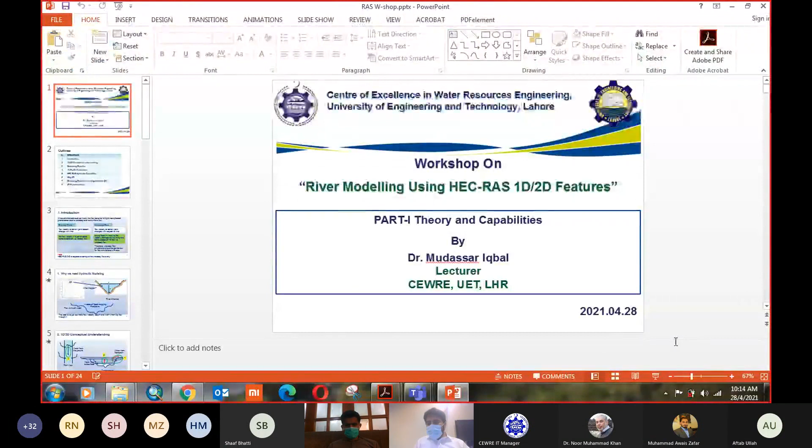Is it in presentation mode? Please just confirm for me. Yes, it is clear for me.

Myself, Dr. Mudassar Iqbal, working as a lecturer at CEWRE, Lahore. Today, the part that I'm going to present is about the workshop on river modeling.

Dr. Mudassar, I cannot hear your voice. Your mic is very far away from your mouth. Is it clear now, sir? Can you put it close to your mouth? Yes, I think it's closer now. Okay, can you confirm for me? Yeah, now it's better, please speak loudly. Okay, but firstly, confirm that your voice is too loud, so speak a little softer.

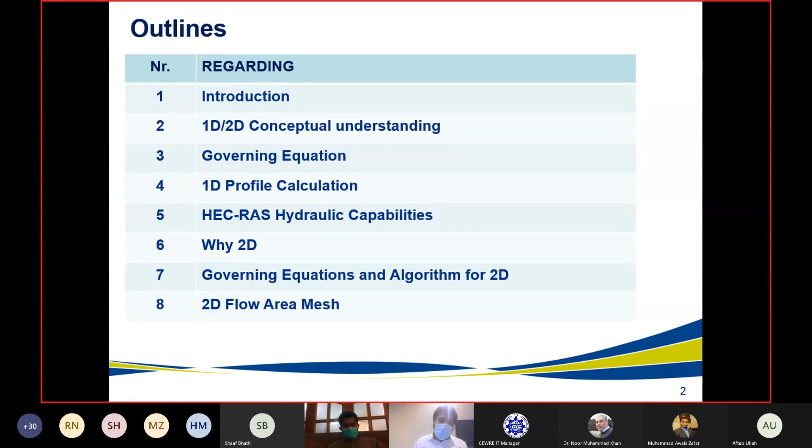As we know, we experience two types of flows in channels: steady flow and unsteady flow. Steady flow is when the flow velocity at a certain section does not change with time. Where velocity changes at a certain point with respect to time, that is unsteady flow. An example of steady flow is a power canal, where we provide a design discharge for the power project. An example of unsteady flow is during floods in rivers, where flow velocity changes during rising and falling stages in the main river channel or floodplains.

But in river modeling, a river is a natural channel, and the flow behavior is a highly complicated phenomenon due to unsteady and non-uniform flow in rivers. So we need to study the characteristics of unsteady and steady flow.

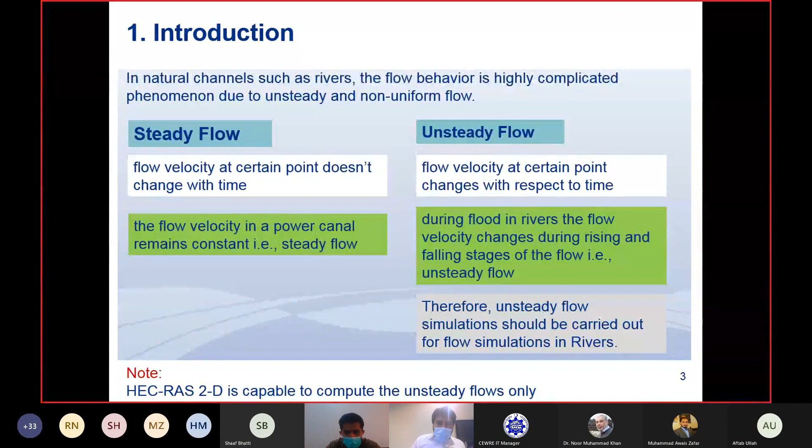Next, let's move to why we need this hydraulic modeling. HEC-RAS goes with HEC-HMS or any hydrological model that provides us peak discharge. So when this peak discharge goes to the river channel, we need to know how wide this discharge goes, how deep this discharge goes, and how fast it moves.

In case of flood mapping in the floodplains, we consider the flow to be much wider than the main river channel. So in hydraulic modeling, our idea is to estimate the flow velocity, flow depth, and width when peak discharge flows through the river. This is the main concept that we follow.

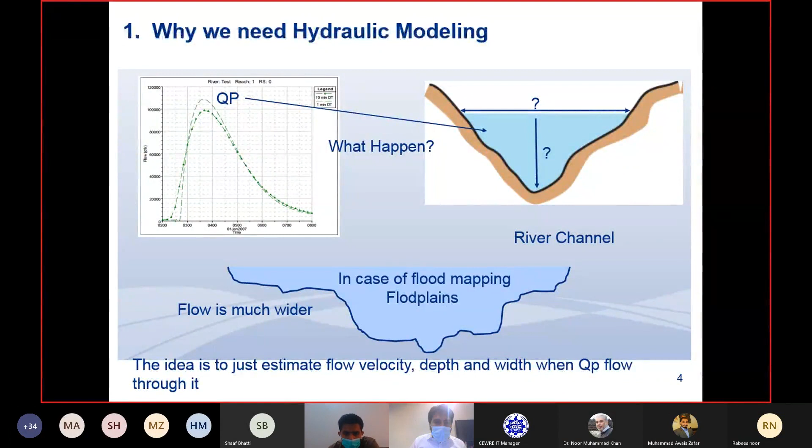Now, some conceptual understanding about 1D or 2D. Let's suppose we have a river plan. The river is flowing downward, and the water comes from the ground from this side. Can you confirm, Wes, that when I move my cursor, it is also displaying on your screen? Yes, Dr. Sahab, it is clear on your screen.

If I shift to the cross section of this plan, we can see what comes from the ground, or plains, and also water that comes from the subsurface. Then the water rises from downside to upside until it reaches the floodplains. Similarly, water comes into the channel, and water goes out to the floodplains.

So we can see that the flow is... just wait a second.

Your voice is muted, sir. I think your voice is not clear. I think there is a problem in your microphone. No. Okay.

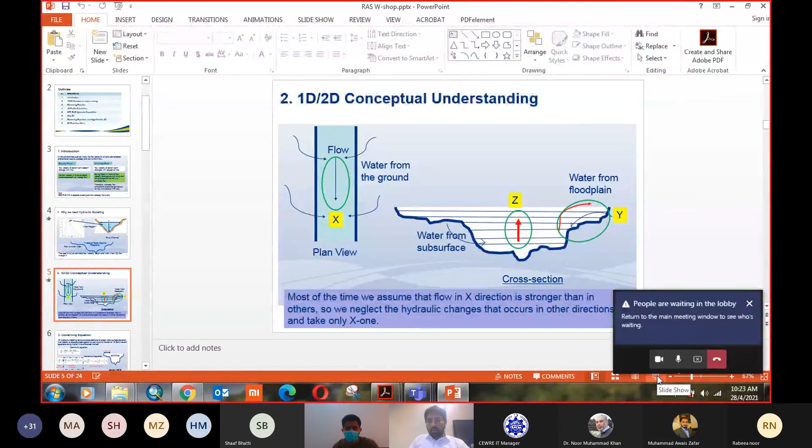So yeah, now my voice is clear. Can you confirm? Just wait a moment, now I will be confirming my voice, either it's clear at all the spots. Yes, it is clear now. Yeah, it is much better. So, on screen also. Yes, it is visible, sir. Okay.

So, when we have water coming and outgoing flow from different directions, then we can say that at that time we have river flow along the channel and to the sides of the channel, and at the same time water is also rising in the main channel, and it goes also to the floodplains.

Then we can say that we have flow in three directions. In the main channel along the channel it is x, to the floodplains it is y direction, and towards upward in the main channel or the floodplains it is z direction. So here we can say that it is three-dimensional flow.

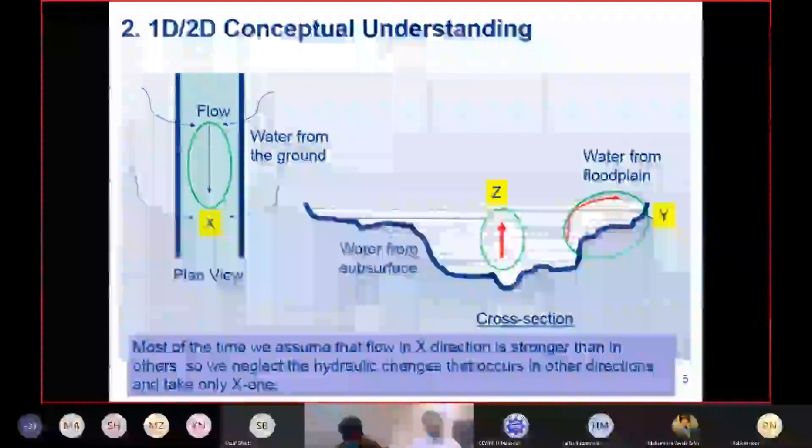Normally, in most cases, we consider that the impact of the flow moving in the main river channel along the channel is much stronger than towards the floodplains or upward. In that case, we can ignore these two directions, and then we usually say it is 1D flow. So what will happen?

It means that if we neglect the flow towards the floodplain or towards upside in the channel, then we are not considering hydraulic changes that occur in other directions, and we take only one direction, that is x. So in this case, we will say it is 1D. If we consider the floodplain direction too, that will be two-dimensional flow.

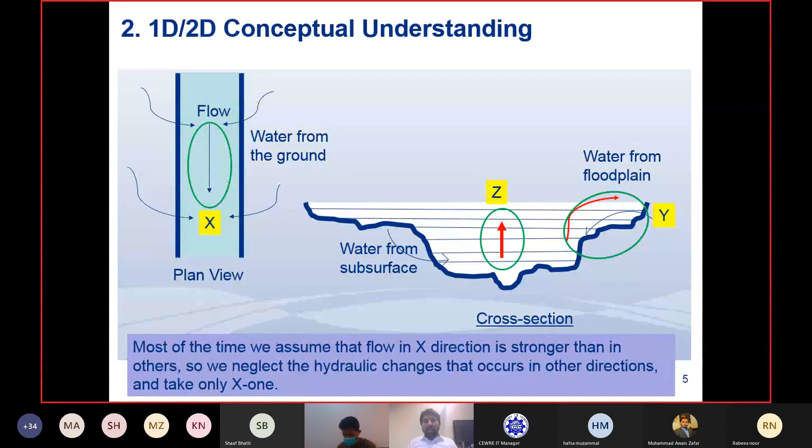So next is the governing equation. The governing equation that HEC-RAS follows is the one-dimensional Saint-Venant equation, which uses the implicit finite difference method, a numerical method for solving it. It is based on the continuity equation and momentum equation. The continuity equation is basically conservation of mass, and the momentum equation is conservation of momentum.

In the continuity equation, the first part is the change of area with respect to time, and the second part is the change in flow with respect to distance. Here we see C and F terms in both equations; these refer to the floodplain flow area in floodplains, where C is for channel flow area or velocity in the channel.

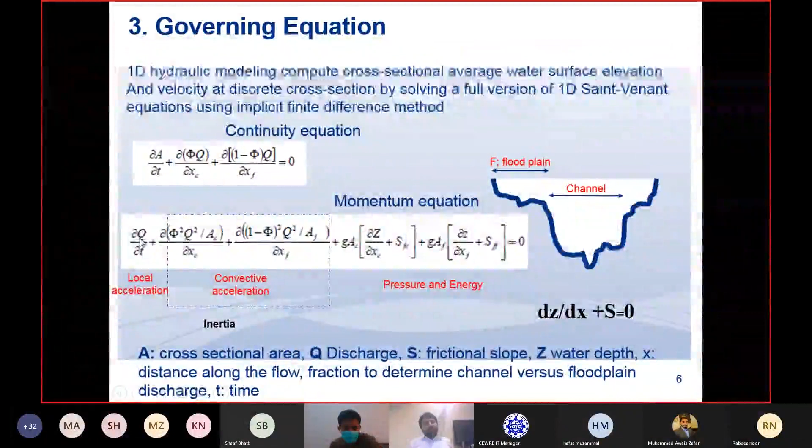In the momentum equation, it is a little bit complicated, but we simplify it in this form: dz over dx plus S. For example, if we consider the discharge flow with respect to time, this equation has four components: first is local acceleration, second is convective acceleration, and the third and fourth are about pressure and energy terms.

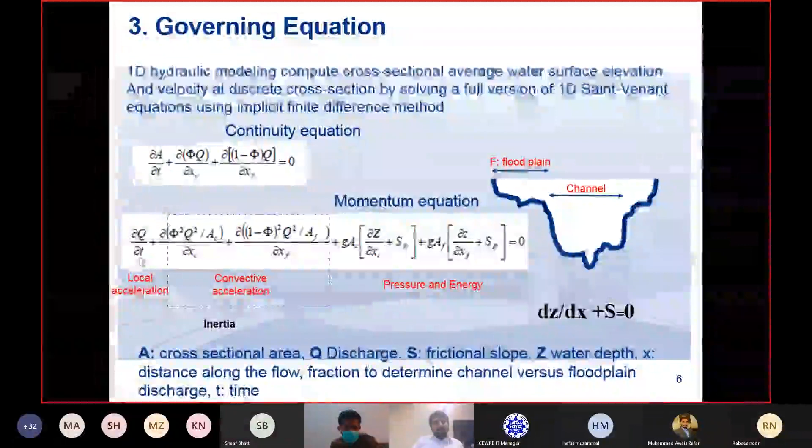If we say that this discharge is not changing with respect to time, or we assume it is steady state, then we can neglect it. The second part is about the change of flow with respect to distance, and C and F are the same terms for flood and channel.

This convective acceleration happens when the flow in the river encounters structures, and convection, expansion and contraction happen; then this convective acceleration component becomes active. But in most cases we also neglect this part.

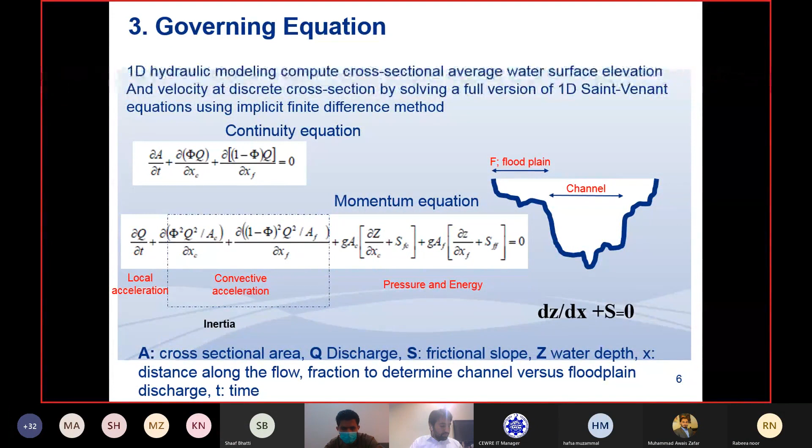The remaining part is pressure and energy, and we can see here it is a potential factor, or we can say it's elevation. So we simplify it as z, like it's a derivative of z with respect to x. So we simplify it to dz over dx plus slope equals 0. This is a simplified form that we try to solve by adding the energy equation.

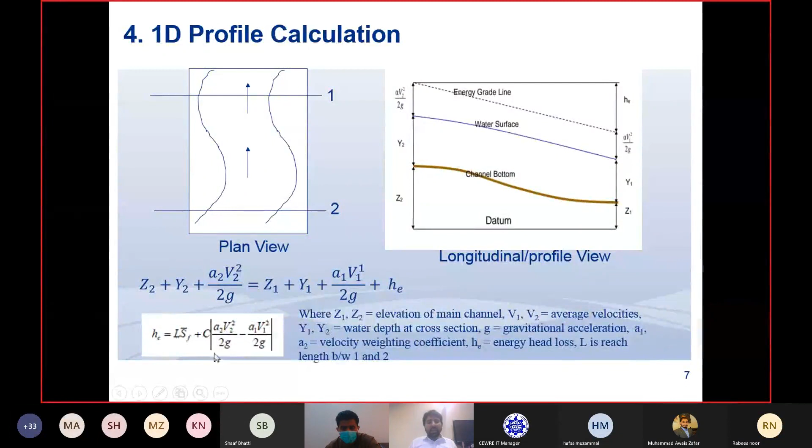This slide is part of the previous one. Here we have again a plan view of the river, with two cross sections. Flow moves from the upstream side to the downstream side, and we need to solve this equation.

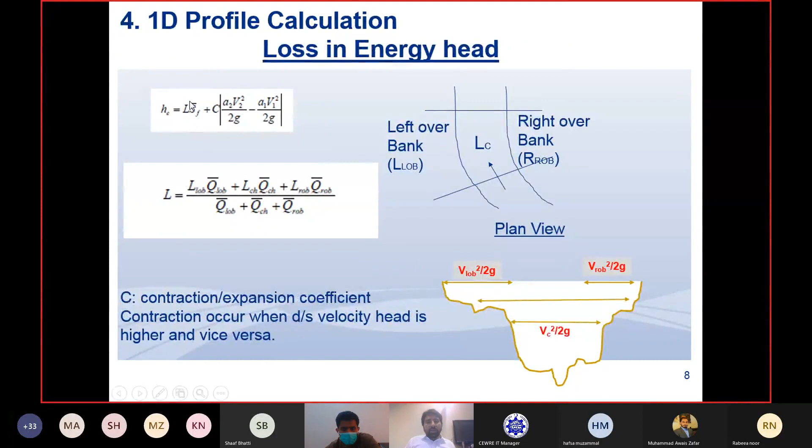From this equation we determine SF, relating it with Manning's formula to determine the conveyance K. We then determine SF from this equation by replacing factors from one side to another. The mean SF from one section to another requires dividing the discharge by its conveyance, for both the first and second sections. So in the computational flow, we find conveyance K and SF based on the Manning's value, so we need to carefully select these values.

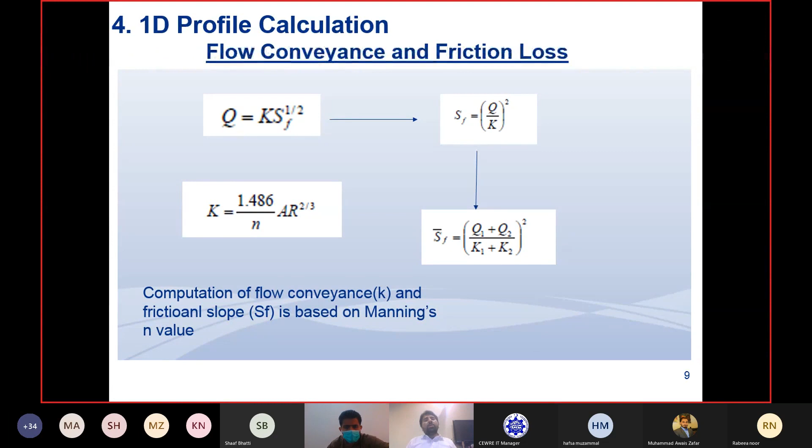Summing up the previous two or three slides, we have the energy equations, and we need to determine mainly the flow velocity and depth. But for this we also have to calculate HE.

Usually we start with the boundary conditions. This step is very important, so please give it a little more consideration. Here, what we do is start the modeling with the boundary conditions.

For example, in steady state condition, we assume a known depth as the downstream boundary condition, and the upstream boundary condition is Q. So what we do here: now if y1 is known, we need to assume y2. With the assumed y2 and known y1, we calculate or find the HE.

Not directly, but with the help of finding K, friction slope, and conveyance. Then we get y2 by putting the head loss value into this equation.

If our computed y2 and assumed y2 are within the tolerable range, then we suppose our assumed condition is good, and we move upstream. If the assumed y2 and calculated y2 are not within the tolerable range, then we repeat, assuming y2 again.

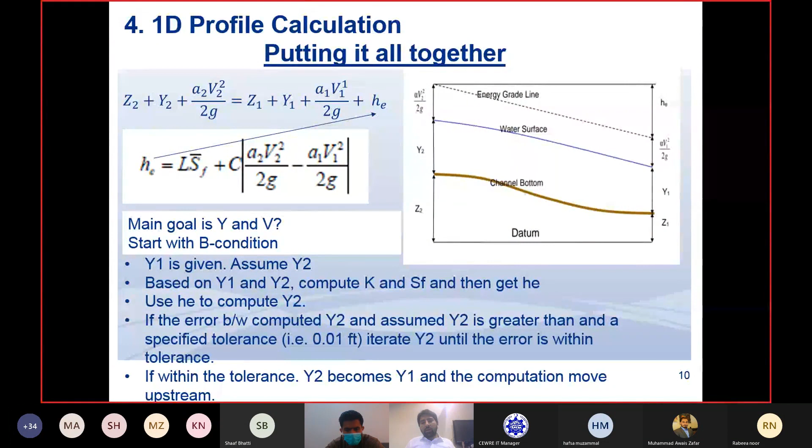Now let's look at the hydraulic capabilities of HEC-RAS. Currently HEC-RAS has the following four types of capabilities to perform simulation.

First is 1D steady flow water surface profile, which I discussed in the last slide. Next, the capability of HEC-RAS is 1D or 2D unsteady flow simulations, which HEC-RAS also works for. Sediment transport computation can also be modeled in HEC-RAS.

And the last one is the water quality analysis we can perform in HEC-RAS. But here, in this webinar or training portion, we are focusing on the first two points: steady flow water surface profile, or 1D or 2D unsteady flow simulation.

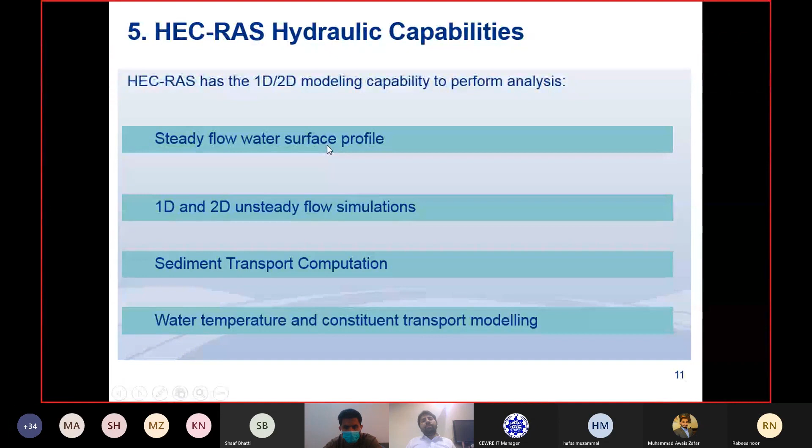So why is 2D flow computation required? Why do we go to 2D? Basically, when we see a non-prismatic channel with varying cross section or bottom slope - that's the basic definition of a non-prismatic channel - we see that we have different values at the same cross section. We have different flow depth and velocity at the same cross section.

And the second is lateral flow from breached dyke, where at the breach, the flow velocity is higher. At that place, flow velocities are much higher. If we do 1D modeling, then the velocity will be less - we will get a lower velocity value. But actually, there is a higher velocity value.

And flow around the spur - if we have a structure along the river, along the flow, then there also water is stagnant and the depth is more and velocity is less. So in this picture, the right side one shows the velocity magnitude or velocity profile. Here, due to the obstruction across the river, velocity is very low because the water is stagnant at this part, and we can see the lower velocities here.

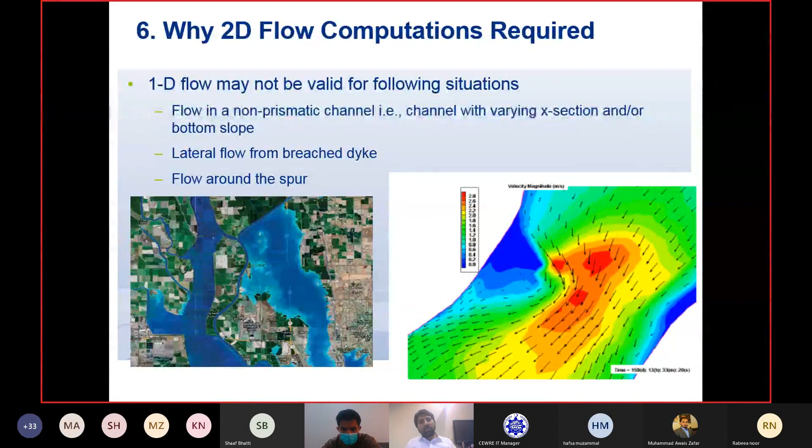So the governing equations for 2D flow are the Saint-Venant equations, the full momentum equation form, used to simulate the 2D flow. And its form, the diffusion wave - HEC-RAS uses this form to allow the software to run faster, so stability is higher compared to the others.

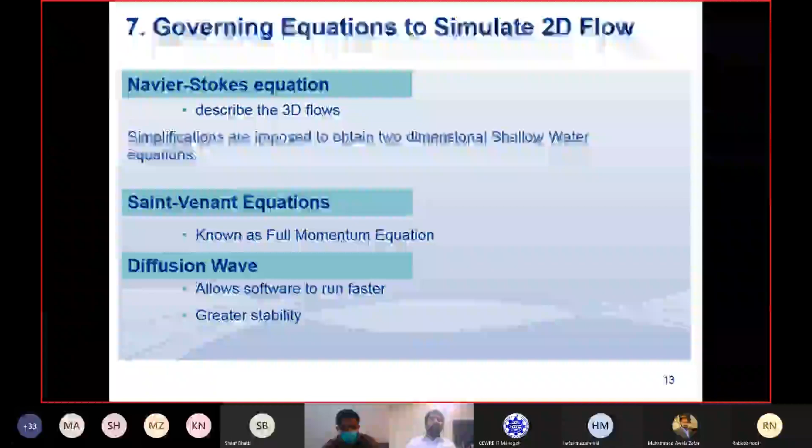So for solving these equations, we have some numerical methods - implicit or finite volume - with advantages for these methods, implicit or explicit. These are approximations, because in these 2D equations, which are non-linear, we have two independent variables. So we cannot solve it analytically; we need to solve it numerically. For that, it is an approximation - we approximate using these methods.

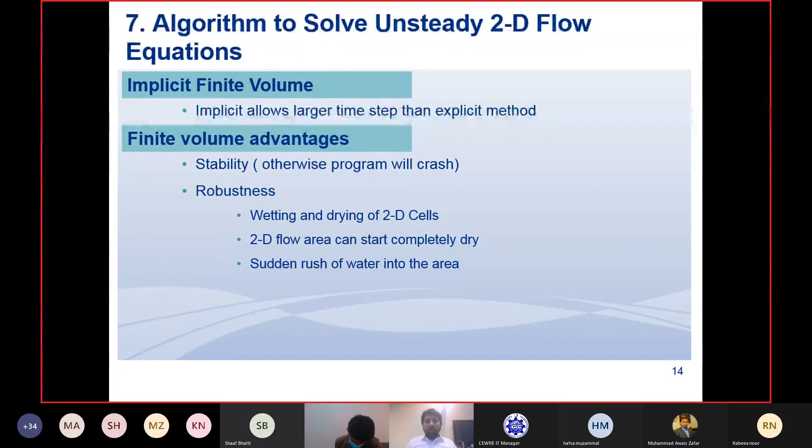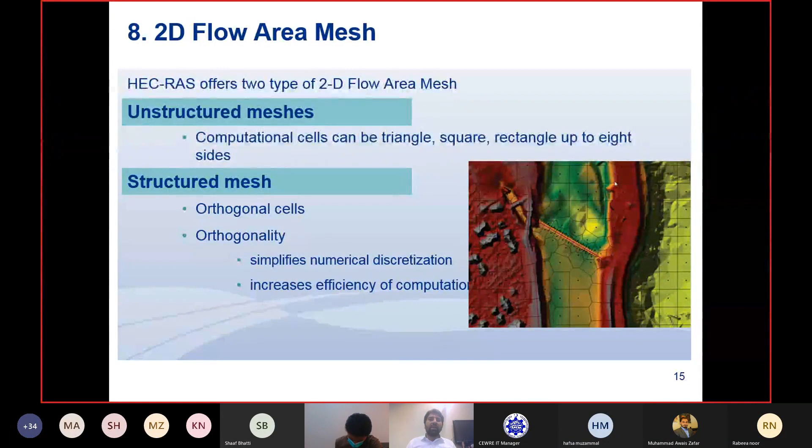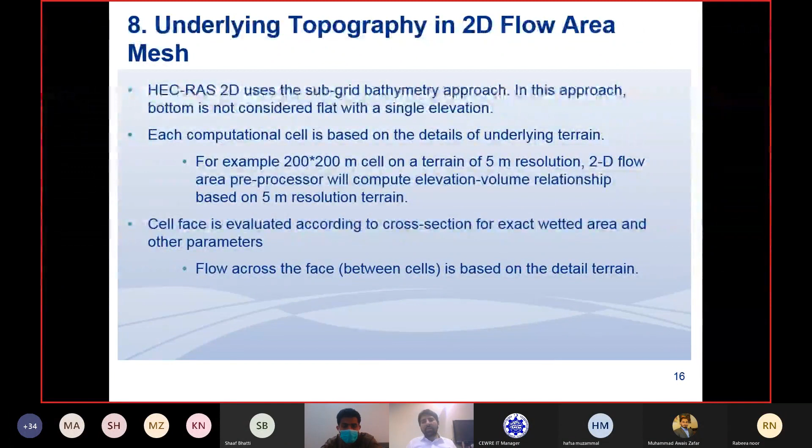So it means that our gridding, our fixation of the grid, doesn't matter as much. The main thing is the terrain resolution or DEM we are using.

Cell faces are evaluated according to the cross section for exact wetted area and other parameters. So the point here is that whatever area in the cell is wet, that will be accounted for. Whatever amount of area is wetted, it will also be used in the computation by HEC-RAS.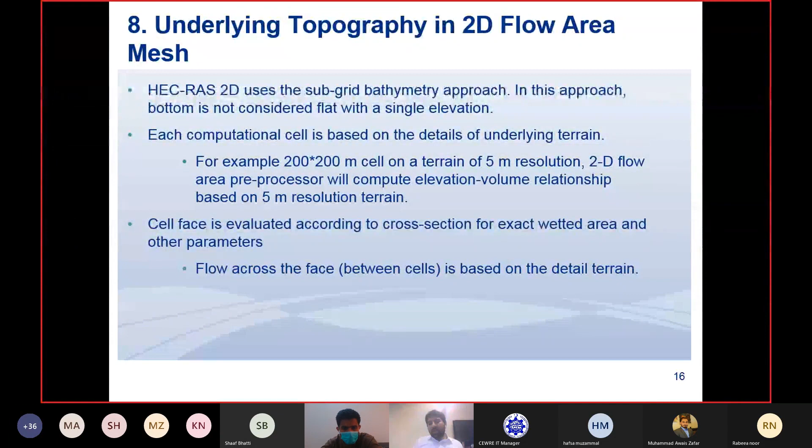Up to here, whatever we've discussed is about what is going on behind HEC-RAS. The reference I've presented this literature from is the reference manual or the open channel flow book by Muhammad Hanif - the second version.

So now what we do in HEC-RAS - that is another part - is the flow formulation of the model, HEC-RAS model setup, simulation, and hands-on exercise. So I think now I...